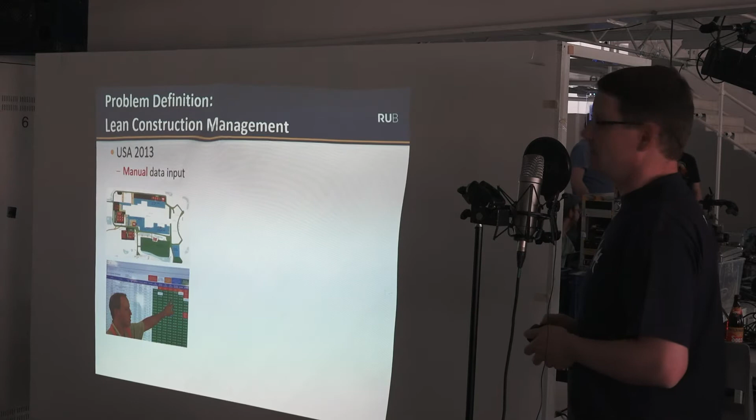A couple of years back, I was in the United States visiting a project from Fluor Construction. They actually had modeling in place as well as data collection in the field. They used tablets and reported that manually in the field, basically clicking by hand on a tablet and reporting progress on site into the field offices. That was a great learning experience.

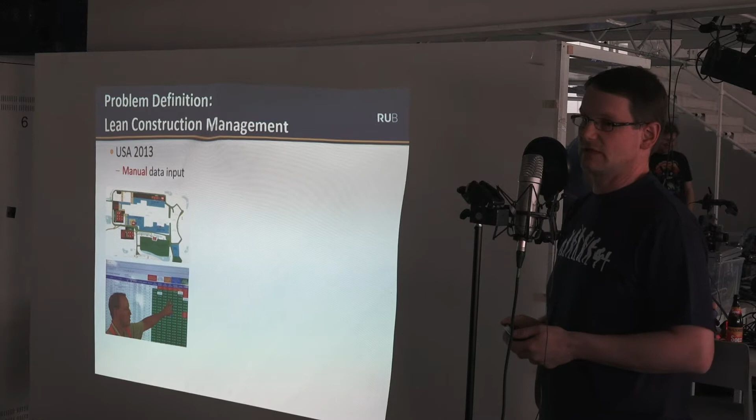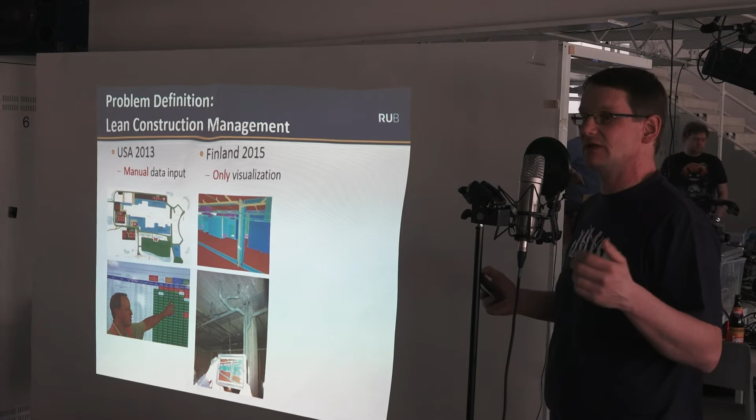If we go to another country, in Finland, I took these images on a construction site by Skanska. You actually can go to a construction site and pull up the model on a tablet and visualize what it should look like, and obviously compare that through looking at the real site to what they have built. You see already there's a slight difference between the water pipes that they have installed. So far so good, but pretty much everything is done manually and there's really no automation to it.

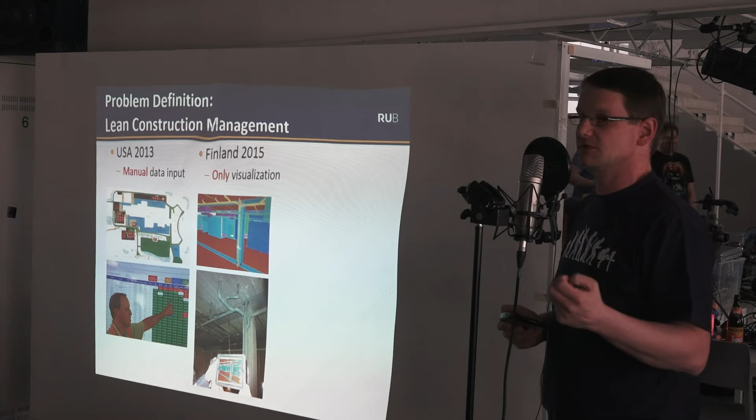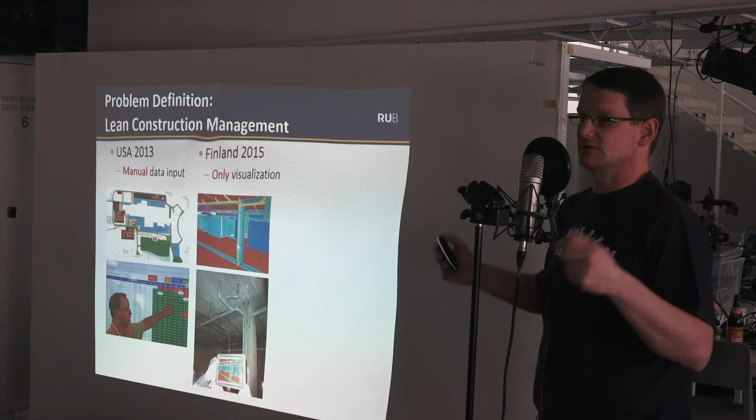We thought about how it's really critical to collect data automatically in the field. I think that's one of the biggest problems in construction right now, to get BIM implemented on construction sites. We plan very well, most of you are architects, that's working somewhat well. Obviously there's some processes that have to be improved, but on the construction site, BIM really hasn't been implemented yet.

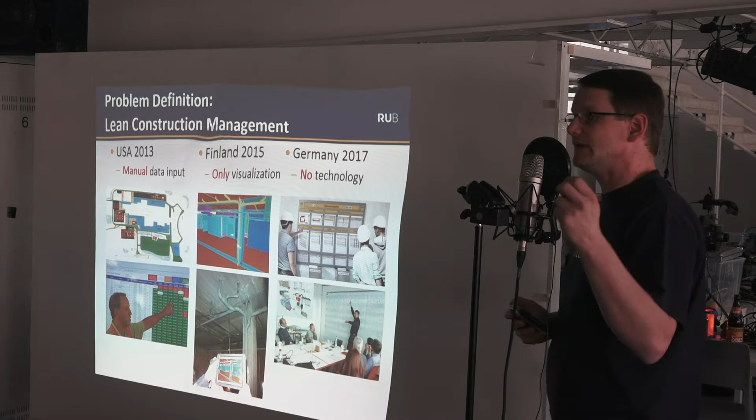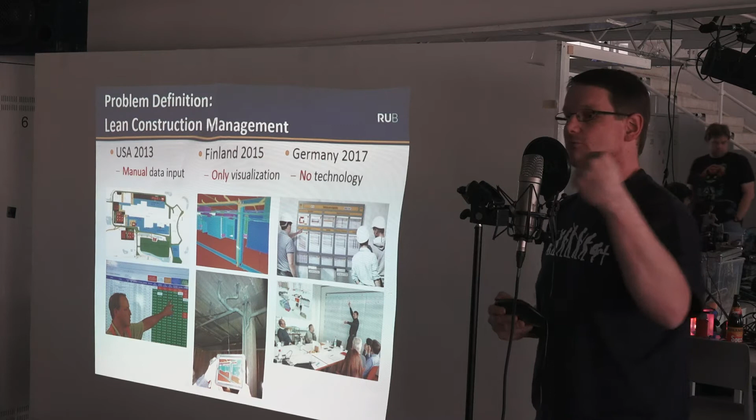I'm showing you here an example from a big construction company in Germany. When they do lean construction management, it's all about discussing, meeting, and all of that stuff is great. However, it takes them a long time to collect the information and then to make informed decisions, and that part we want to change. It's so important, I've seen it with so many different companies.

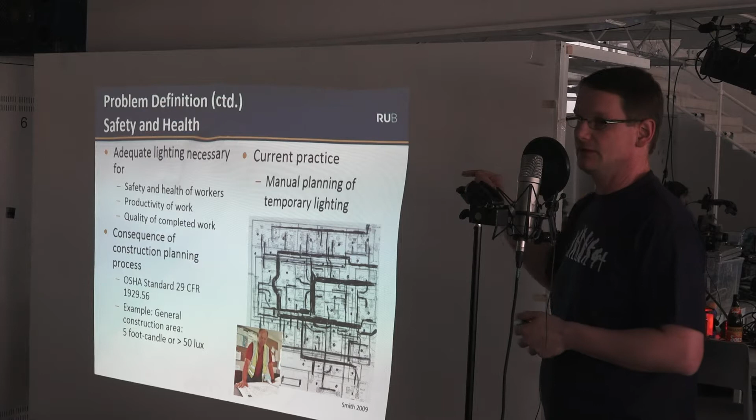Another problem we have is related to productivity. Now, safety — you know the inverse curve of safety and productivity. The safer we plan a job site, the more productive we are. And that's actually the buy-in into safety. You can convince your CEOs that if we plan our job site safer, we actually can work more productively. That saves us money.

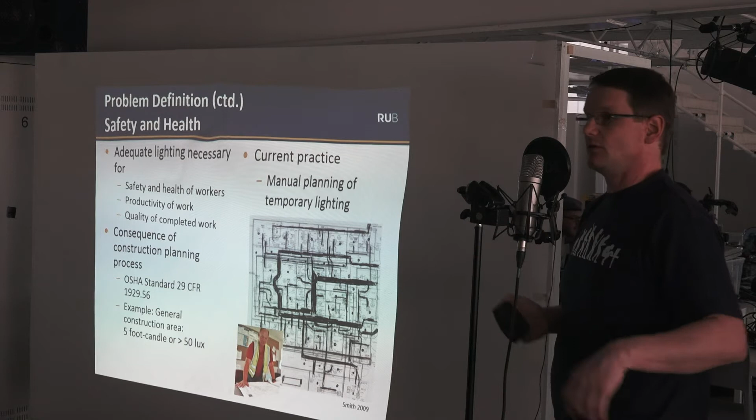We picked a very specific scope here for our hackathon. We didn't have much time, and we really drilled down into the detail, and we actually wanted to measure lighting inside the work environment. As soon as lighting gets worse, according to rules and laws by the government, we're actually not allowed to perform the work.

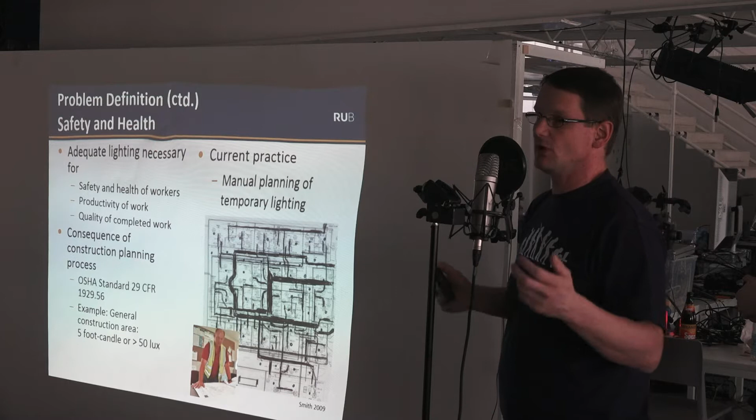Here I pulled a record from OSHA, and these records are pretty much known to very few people, typically experts, site inspectors, or in Germany called Sicherheitskoordinatoren, who are sometimes at the job site and sometimes not, which pretty much leaves the workers alone in their judgment — can I work here or should I not?

The other part is, if you have poor lighting conditions, it affects your quality of work, and you want to make sure you have high quality work, otherwise you have rework, which adds costs to the construction project. So these rules exist, they are written up in books. You see here on the bottom an engineer and safety engineer who knows all of that.

It's in his head, but it's really not well applied to information models. There's one rule, for example, which measures lighting conditions. It says 5-foot candles, which is pretty much a lux value of over 50. That is appropriate for doing safe work on a job site and producing high quality work.

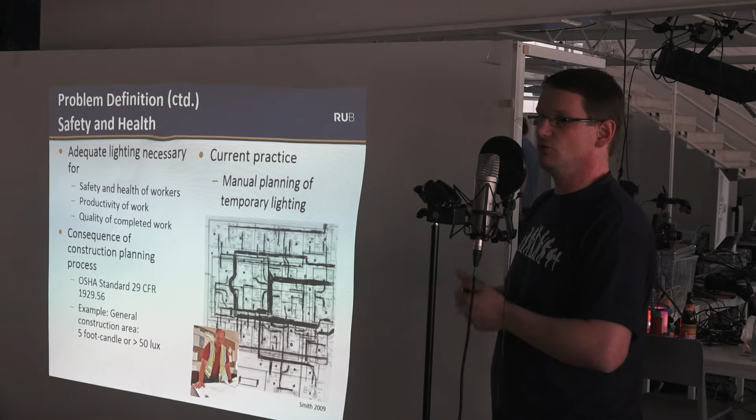On the right hand side you see the current procedure. People print drawings and hand mark where light bulbs, very bright ones, are installed in interior buildings. This takes time, and it's often not optimized. There might be dark spots where you would not be able to work. We want to give people tools to check if there's enough lighting, so they can install the proper lighting technology for their work.

So what we thought is the concept. It's pretty much using a smart helmet. Where's our helmet? Here we go. Thanks, Olga. So this is a prototype.

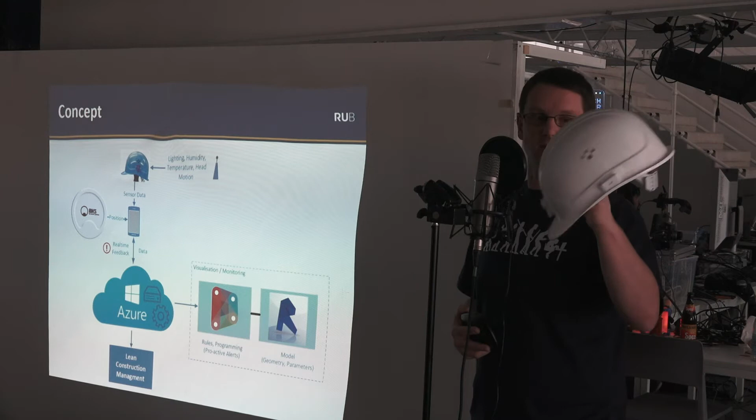It's actually the wrong location. I mean, you cannot mount and destroy a helmet by drilling just a couple of holes. Just as a side note, it impacts the stability of the helmet. But anyway, we did it here just for demonstration purposes.

It's a 3D printed enclosure. We established the AEC sensor, which can measure temperature, light, humidity, and all kinds of things. We connect this sensor with a Bluetooth low energy beacon that we install in rooms. That gives us a connection through an Android smartphone and the beacon to the Azure cloud, where a lot of data is processed, as well as connected to Dynamo, which connects to Revit, where we have our building information model.

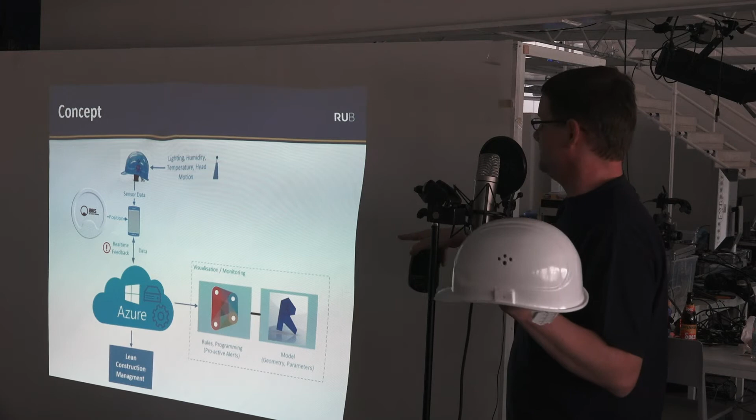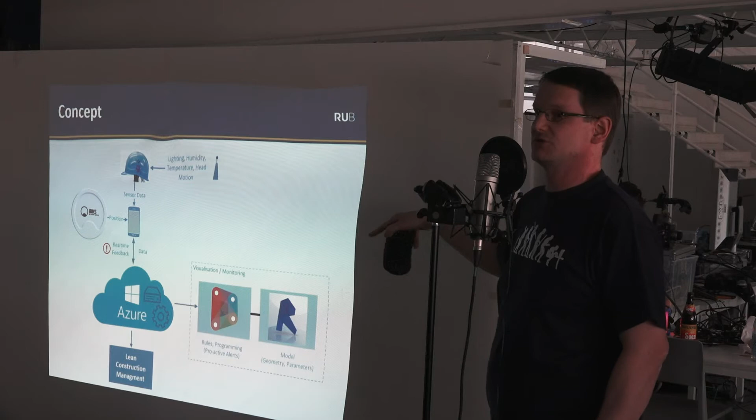All of that stuff was really done this weekend. It was a big goal in my life to get this done, and those 3 kids did it. It's really impressive. The other part is we didn't use any nodes or Excel sheets - we directly go from the cloud to Dynamo, which simplifies the process as much as you can. Obviously we have the safety application, and at the same time we can impact lean construction management, but that's stuff we will do in the future.

Now we will have a short demo that those folks will be doing.

Let's cross fingers that everything works.

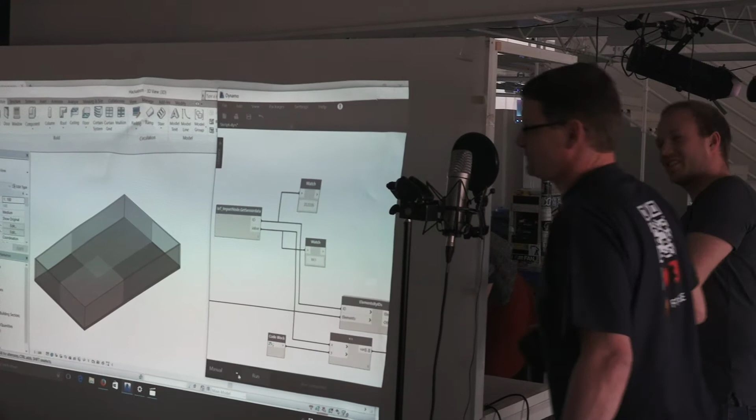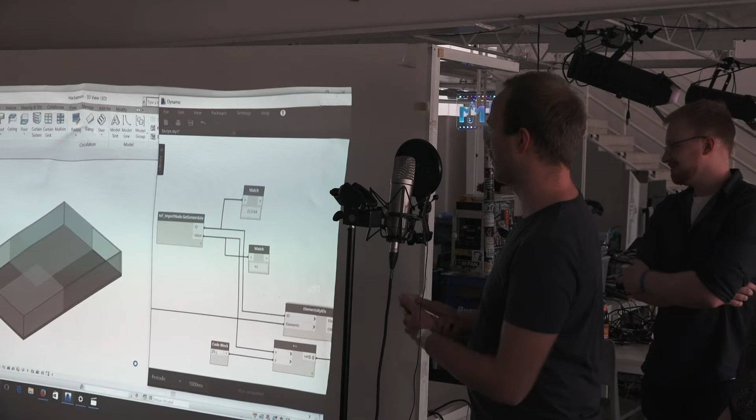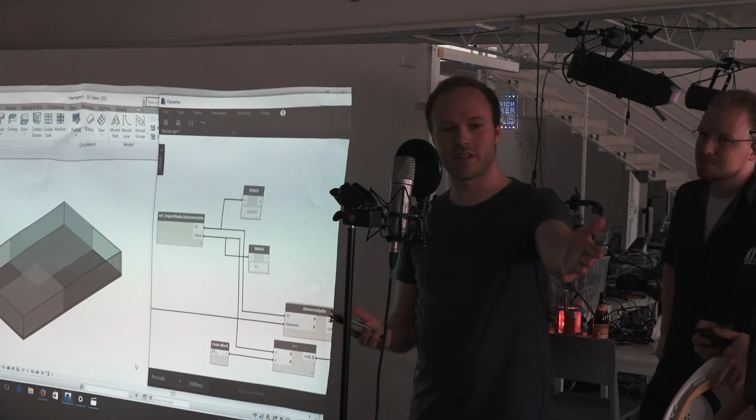Okay, I will show you our live demo, and all you see is done this weekend, so it's very prototype. As you can see, it's a model of this room, and we have divided the room into 4 areas. One area is right here, and we have placed 2 beacons - one is simulated by my smartphone over there, and another beacon is over there. We have this Android app which measures the light with the lighting sensor of the mobile phone.

We didn't connect the helmet because of time issues. So what the app does is measure the light and get the position of ourselves with the beacons, so we get the information of the lighting and the room.

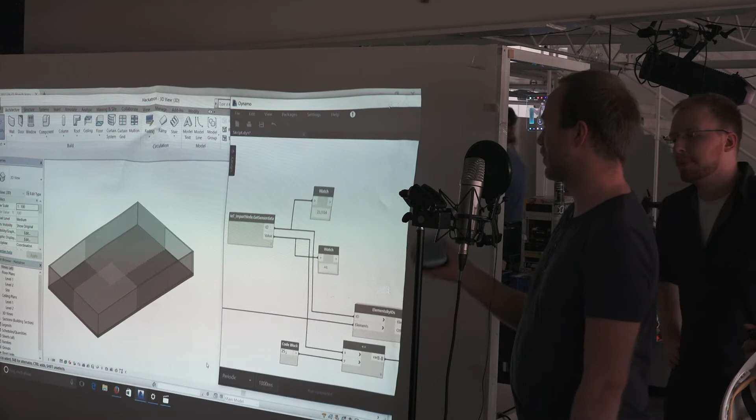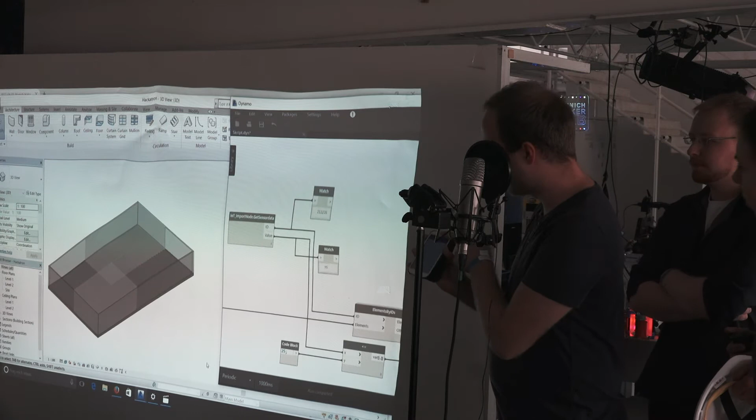We upload the information into the Azure cloud, and in the cloud we process this information, and we can get feedback if it's too dark in this room. I can show you - if I put my fingers on this sensor, we can see the worker gets the feedback on the smart device, and maybe another person back at home can see, oh, the room is too dark, and can check it.

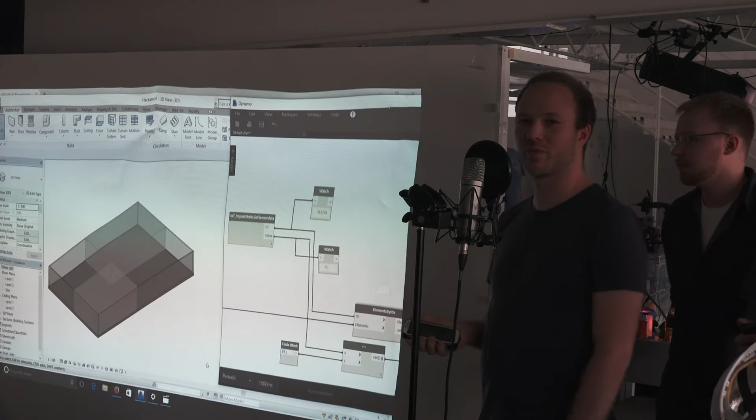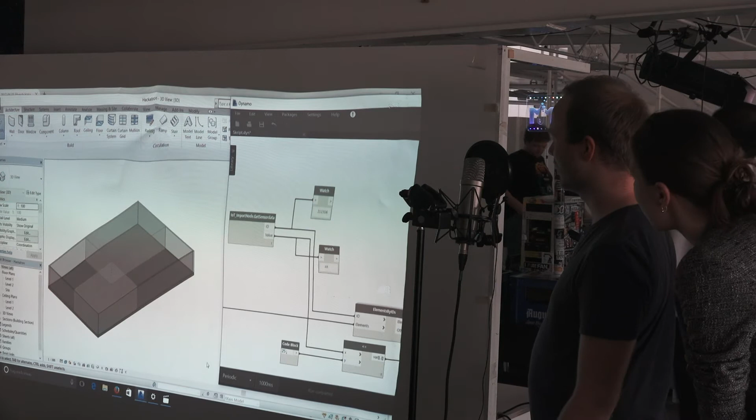So we will show you what happens if we move to the room over there, and hopefully it detects the change of the room. So maybe... yeah, it changed.

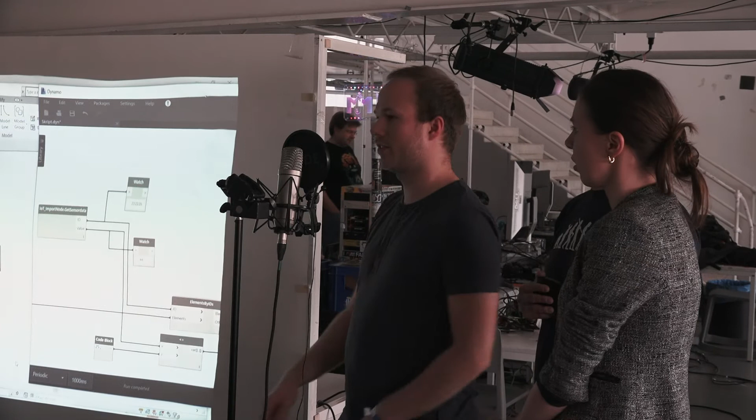So all the data we upload to the Azure cloud is collected, and after the project we can analyze the data. We can look at how long a worker has worked in one room, and we can use all this data for lean management in construction, and get better time planning. Yes, that's it.

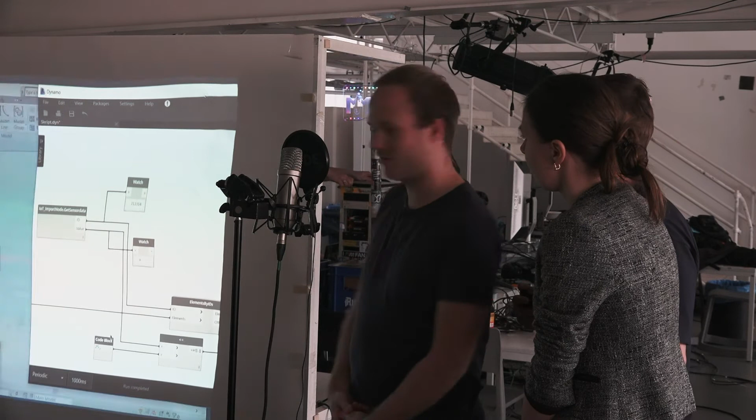Okay, as we switch back to the PowerPoint, obviously there's various applications which can be followed through. Here's just the backup slide, I think we don't have to show that, but actually if you have your cell phone with you, you can actually visualize it.

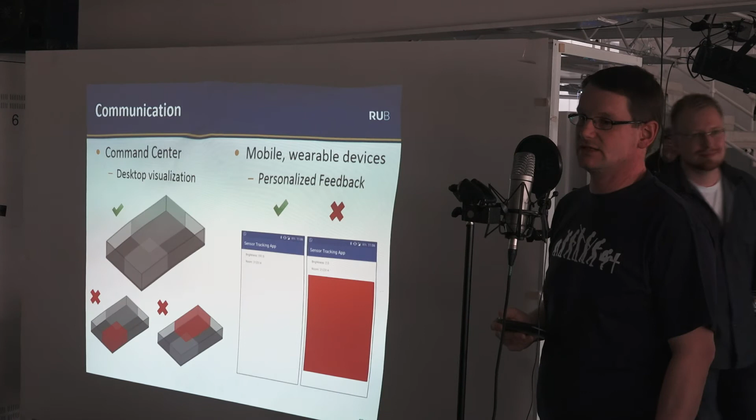So it's actually personalized feedback on the right hand side where you can get that feedback if you need it. This is a very particular application, but I've experienced that on job sites where OSHA inspectors had issues with that and they were not able to measure it. They had very complex measurement techniques to measure the lighting conditions. We simplify that process tremendously. It saves them time, speeds up the process.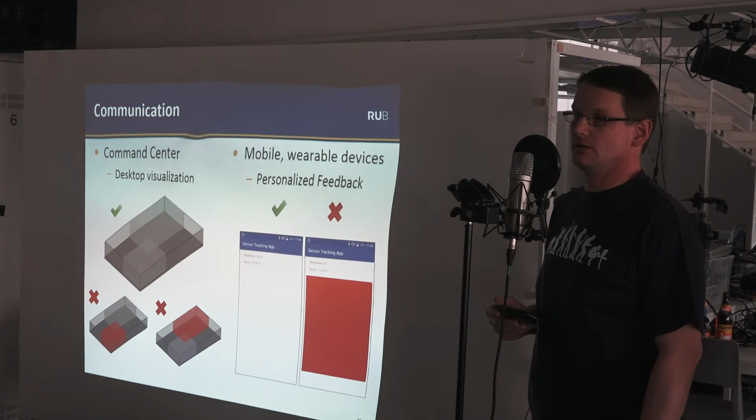On the left-hand side, we envision even a command center, which will happen anyway for construction, where a site inspector can oversee job sites for multiple construction sites, not just one, etc. These are all kinds of models, business models I can think of.

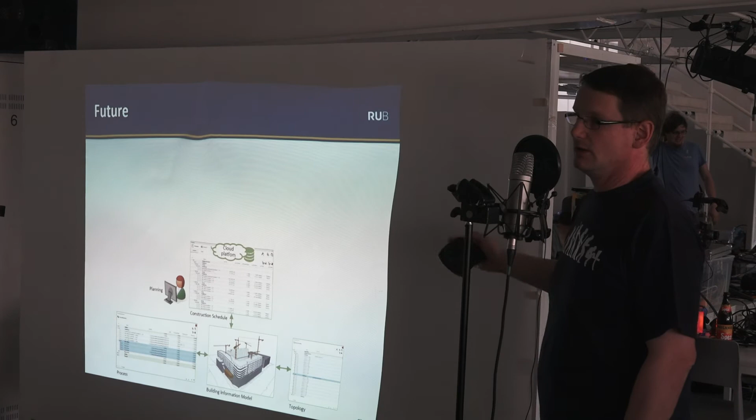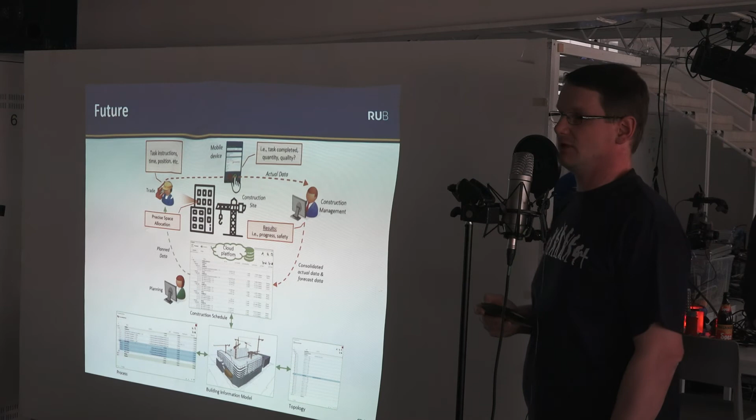Markus mentioned it already. In our other research, we actually have building information models. We draw automatic schedules from that. We will show that information to the construction trades as they have to go out, provide them with detailed instructions, knowing where they have to go according to the lean construction management methods. They will then be able to push buttons, hopefully the green button saying that they have done the work. A construction manager can check quality, report feedback, all of those tools. Some of that, Autodesk has some tools already available for quality measurement, etc. But all of that will be done through interaction with cloud services.

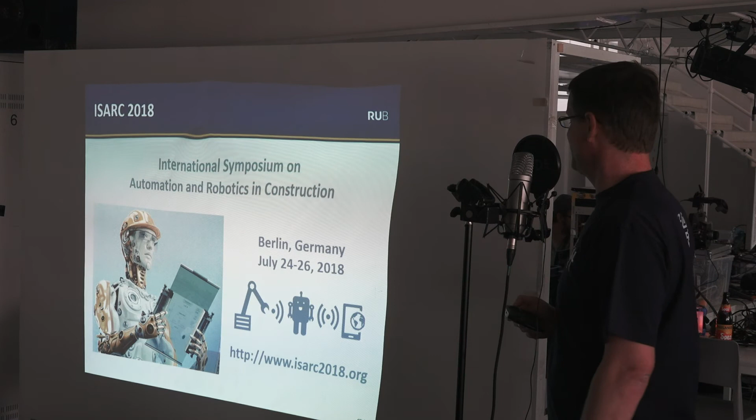So bacon, you now understand why we chose the team name Bacon. It refers to beacons, but let me say one word to beacons. There's several technologies. We've experimented with several of those ones in our labs, ultra-wideband, other technologies for real-time location tracking, and they all have limitations, same to iBeacons or beacons. Make sure if you use anything that it works reliably, especially if you work with safety.

But I think what we solved here is getting any sensor data in with Dynamo Azure and connect it with cloud and visualize it in real time. I'm really, really proud of what they have done, and thanks for your time.

Can you share this to other people, for example, in open source, because they can study it a little bit more and try themselves? Absolutely no problem. I think we have to figure out the proper outlet, whether on our website or on our university website. Shouldn't be an issue. Would be more than glad to do that. Maybe AEC Hackathon has some, we put it up on GitHub there, so yeah, if you can publish it there, it would be very nice. And same thing with the other team, this search and rescue, if they can. I think it's always bonus when we are thinking the winners. They just said that they will do that, so I see them in the back. Good. Well, thank you very much.